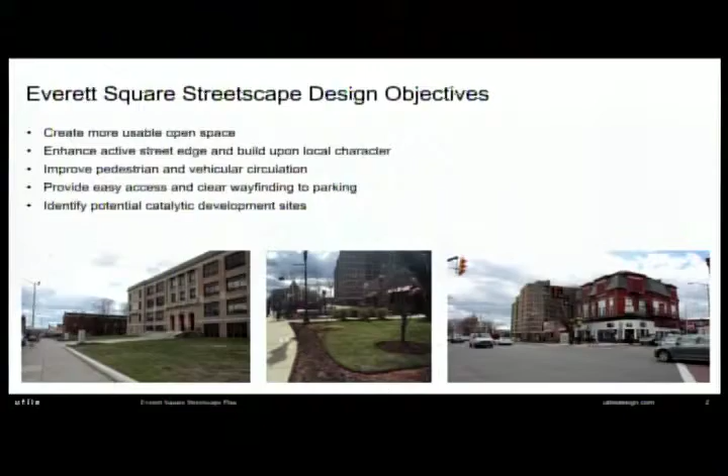Yeah, that has to be green. Thank you. Sorry, can you hear me now? Yes. Okay, should I repeat what I said, or did you hear me? Please don't, they say. Okay.

So there were a couple of objectives for the project. One was to see if we could create more usable space for pedestrians in the square, while thinking about traffic issues at the same time. We thought about ways to improve the character of the square, which mostly had to do with some of the abutting properties, both existing storefronts and maybe potential new development that we'll talk about. I already mentioned pedestrian and vehicular circulation, getting those in balance with both functioning better.

We wanted to think about ways to make it easier to find your way to parking if you're coming to the square for a restaurant or a business. At the same time, we wanted to see if there were a couple of potential development sites that could be more catalytic, which I'll show you as well. So that's a bit of background on what we worked on.

The scope of our study extended from Norwood Street north and south, just past the old high school, going north on Broadway, down to 16 and just past the school going down Broadway in the other direction, and about 2 or 3 blocks off of Broadway to the east and west, to think about a larger area of influence. We didn't do concrete recommendations there, but that larger area focused along Broadway, and we thought about traffic and people walking to the square within that larger radius. You can see on the left a blow up of the area in terms of what we looked at.

Our primary focus was the streetscape and open space at the Norwood and Chelsea Broadway intersection, the main intersection to the square, but also the way School Street slips off of Broadway and heads on a diagonal heading south. We wanted to see, because the School Street intersection was so close to the Chelsea Street and Norwood Street intersection, if there was a better way to arrange that.

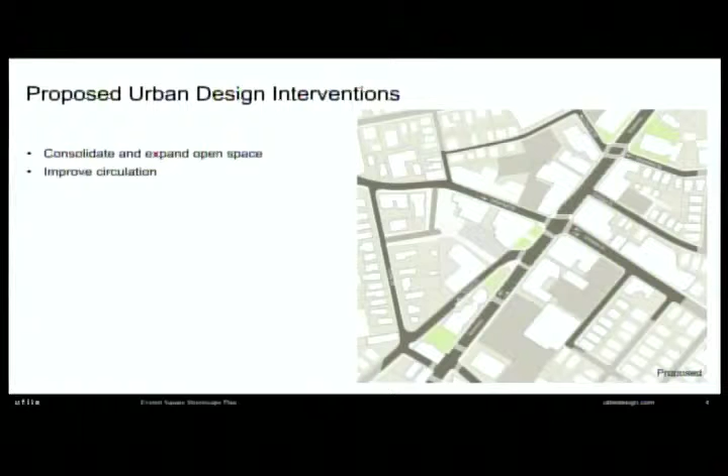One of our initial ideas and recommendations, working with Jay and Tony from the planning department, was to extend Union Avenue through and connect to School Street Place to make that a more legible street. One advantage is it would allow for more traffic flow, since Norwood Street is currently one way eastbound with relatively fewer choices, to get more of a traffic loop that works better for people coming and going through the square.

You'll see in a couple of slides that we were able to do that without losing any aggregate parking in the square, looking at all of the recommendations we're making.

Our other recommendation was to extend that new street as a straight street all the way to Broadway, to get rid of the slip lane and make that a more conscious turn off of Broadway. The advantage is that we can make the open space, both in the square and in front of the library, larger and better connect them visually.

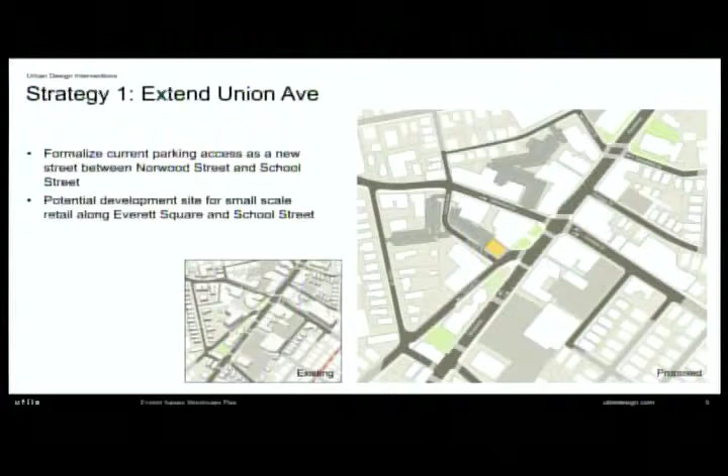If I go back a slide, that's the before, that's the after. The consequence is that we can make the open space at the nose of the library and the open space in the square more of one park landscape, one experience, so they seem like one space and not two.

Our inspirations for the renovation of the park include some things we're recommending to make the grassy spaces more usable.

One of our recommendations is to get the lawns up off the sidewalk level a little bit. That makes people want to sit on the grass. When the grass is down at sidewalk level, people are less motivated to do that.

We also want to use some of the edges of the lawns as seat walls that people can sit on. These are two inspirations, Lafayette Square in Cambridge and the Marriott Plaza at the Kendall T station, showing the kind of space we're talking about.

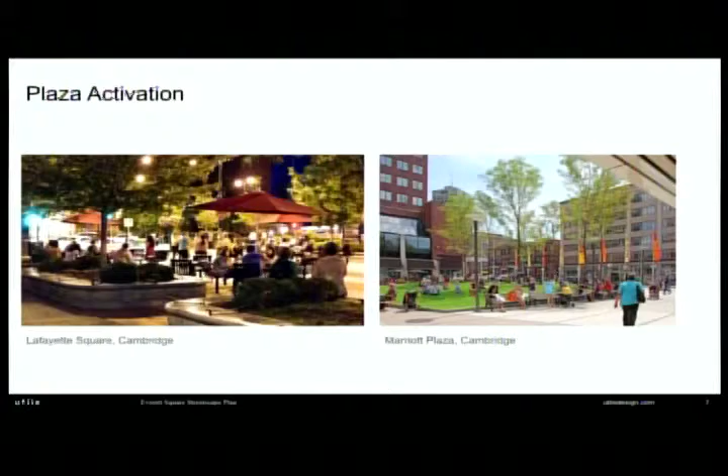The idea is that the short piece of School Street, which either connects through to School Street Place and Union Ave, or requires a left down to School Street, would be a raised intersection with paving that matches the park landscape on either side, with bollards, giving a bit more of a European feel where those streets connect, creating a continuous landscape from Everett Square south to the library.

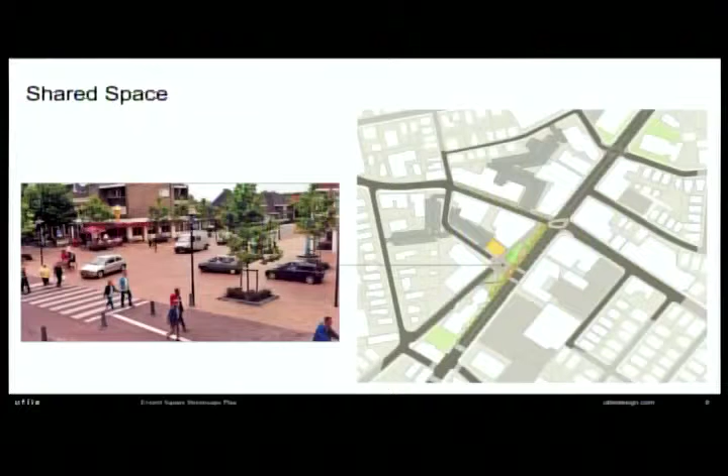This is another inspiration photograph of what that can look like, and this rendering shows the consequences. You'll see in a few minutes that this sets up a new development site at the corner of the new School Street Place and Union Avenue extension, and the way the landscape is designed to cross from in front of the library over to Everett Square.

The design includes three triangular grass panels that conclude with three steps you can sit on, facing this new treatment of the road, with seat walls on either side where people can sit, and handicapped access to the lawns.

The skinny end of those triangles are grass ramps so you can get up onto those lawn panels, and they're a nice size for people to sit on when the weather is nice.

Down towards the library, we have a seating area with movable park chairs, using the library as a backdrop, on this end.

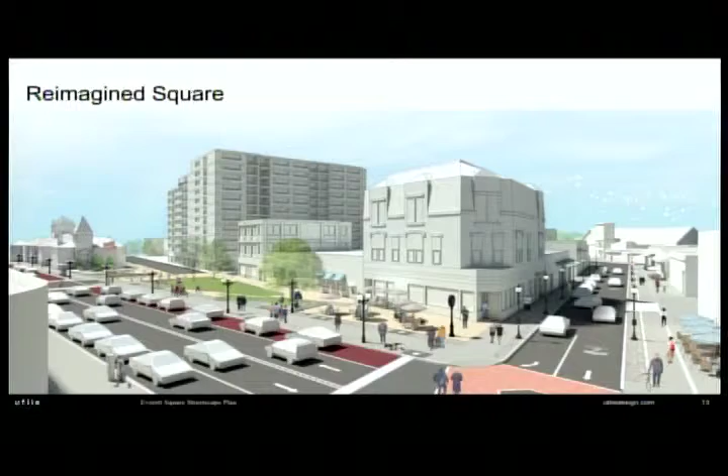So Jessica's now going to talk about some thinking we did about Norwood Street as part of the same concept.

Thanks, Tim. So again, my name is Jessica Robertson. I also work at Utile, and one of the major things we're focusing on with this study is Norwood Street and how to really make that a more vibrant place to be.

One of the things we were considering is, should the traffic, currently it's one way, sort of eastbound, and so we were looking at whether or not we should change the direction but keep it one way, or perhaps make it 2-way in order to get a different pool of people exposed to those businesses. So we looked at a number of different options, including both the traffic direction and expanding the sidewalk as variables.

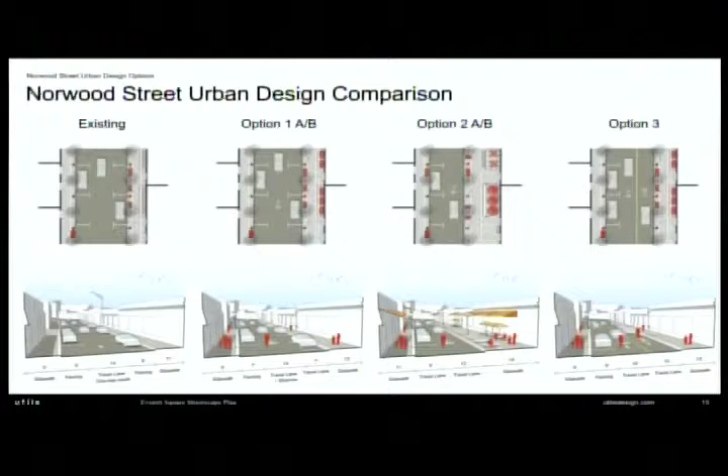So in most of these options, we removed a number of parking spaces on the north side of the street to either widen the sidewalk significantly, or in the case of option 3, to make the street 2-way.

What we found in terms of the traffic comparison was that while keeping it one way in either direction had potential positive benefits for enhancing the character if we combine that with widening the sidewalk, the other benefits weren't really there for reversing the direction but keeping it one way. And if we were to reverse the direction, it would require a lot of other reversals on other streets, so that would be potentially really complex.

In terms of the 2-way option, it would definitely increase the exposure to some of those businesses, and it would potentially simplify the parking and the general circulation by having more options for which direction people can go.

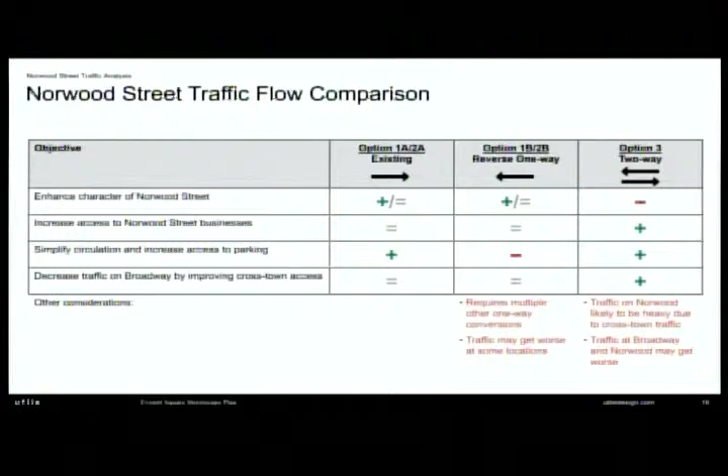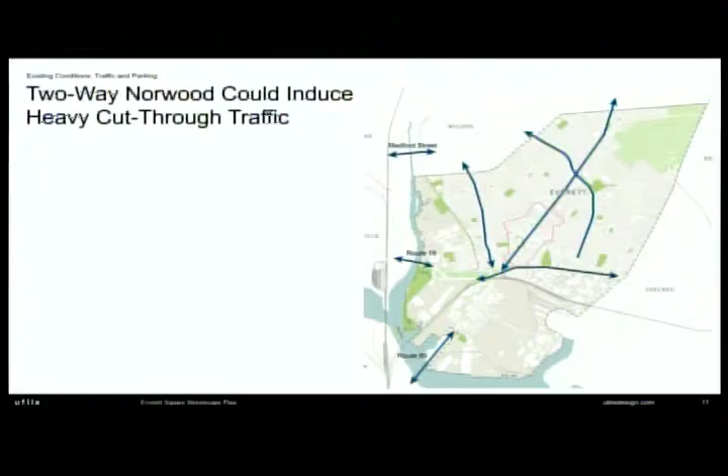However, we were concerned that because there are very few ways to get across Everett, as you can see in this image, most of the streets bump up against a one-way or aren't exactly aligned, so you would have to make a right on Broadway and then a left on another street. So we were concerned that if we made Chelsea Street and Norwood Street continuous in both directions, that it would

actually induce a lot of cut-through traffic, and so you would get Norwood Street overwhelmed with traffic, and it wouldn't necessarily be the people we were hoping to attract who are coming to stop in Everett Square. It would just be people trying to get across town.

So for all of those reasons, we recommended that we keep it one way in the current direction, but that we expand the sidewalk on the north side of the street. This would allow us to have space for sidewalk cafes, for trees and better lighting, and also it would only remove 9 parking spaces, which we talk about in this particular diagram.

If you can see, hopefully you can see a little better on your printouts. We've combined all of these moves on Norwood Street with reconfigurations of the off-street lots that can make them a little bit more efficient, so that we end up only 2 spaces down for the entire square. So we think that the placemaking benefit of widening Norwood Street is really important, and that can really improve both the character of the square and the vitality of those businesses.

We think that by increasing access to the existing parking elsewhere in the square, we can make up for losing that small number of spaces. So in addition to reorganizing the way the parking spaces are striped in the off-street lots, we're also making a couple other important changes here that will increase access to parking.

Right now, the Corey Street entrance side of the parking lot is not very well used during the day. It's usually pretty empty. Part of the reason is that it's an exit only onto Corey Street. So by flipping the direction of those spaces and making it an entry from Corey Street, we think a lot more people are actually going to park in that section, giving us higher utilization of the spaces we already have.

Also, that can help potentially with the traffic on Norwood Street if we're peeling people off sooner. We're proposing that this be combined with better parking wayfinding, so that if you're coming north on Broadway and your ultimate destination is somewhere in Everett Square, you'll see a sign that says parking this way when you get to the fire station, telling you to take a left here to get into the parking lot, and you won't go all the way through the middle of the square.

Same thing with the Union Ave extension that Tim mentioned earlier. Right now, Union Ave comes out on Norwood Street past where the parking entrance is, so you can't get into that parking lot if you're coming down from Union Ave. With our proposed realignment, you can go straight through, so anyone coming from the north would also be able to get into that parking lot.

Finally, the Union Ave, School Street, New Street section that we're proposing is 2-way. That's how it's shown here, and there's room to make it 2-way so that you could enter from both directions and access the parking that way.

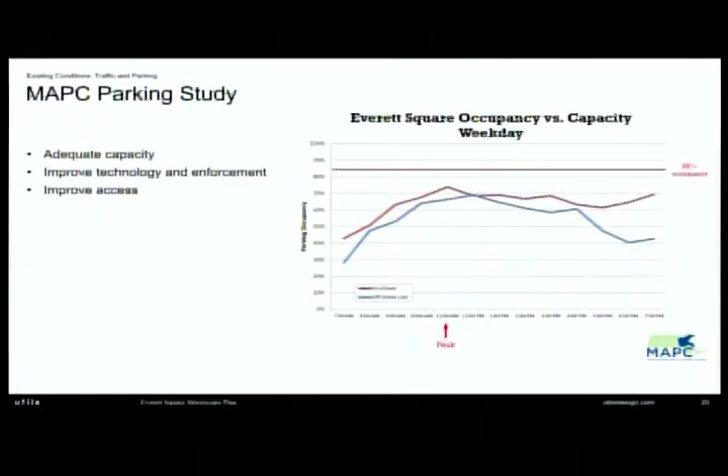85% occupancy is a typical target. That means it's well used, but you can still find a space. We're below that for both on-street and off-street parking. So it's really a matter of using parking management and new parking technology, along with some of these access improvements we're talking about, to make sure we're utilizing the existing spaces more evenly, rather than necessarily looking for more parking.

And then Tim's going to come back and talk about the development.

I want to reiterate that the off-street parking lot layouts we're proposing, and their access points, are going to make the distribution of parking in them more even on both sides of those lots, helping with the perception of available parking spaces. We think with good signs, catching people coming from the south up Broadway or coming down Broadway from the north, traveling south into those parking lots will help with the perception that there's parking available in the square.

I also wanted to comment that we're proposing wider sidewalks on both sides of Norwood Street, 2 feet wider, from 9 feet to 11 feet on the south side of Norwood, and quite a bit wider on the north side. We favored the sunny side of the street because those sides tend to work better for outdoor cafes in general, so that was the logic for that.

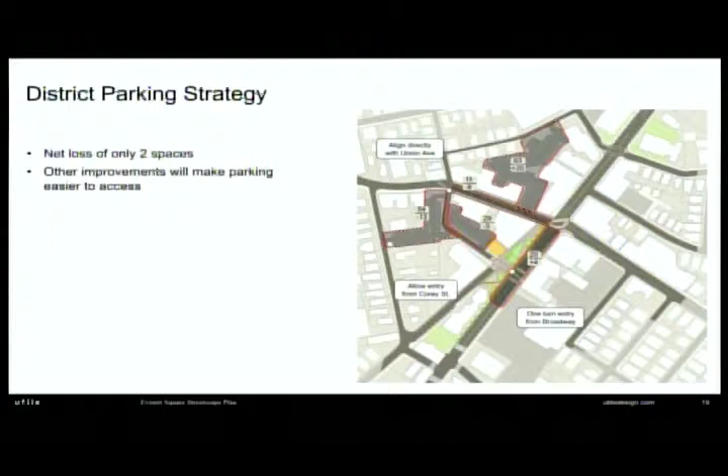I'll transition to the next piece by saying that part of the logic of this plan is to make those two parking lots much more clearly the visitor parking for the larger choice to go to the square, park once, and do a couple of things, rather than just parking to do one errand and then moving your car again. That's a little bit the logic of it, and that feeds into the development concepts we're going to show you.

One of the things we wanted to address with the plan, and this next piece is a slightly later phase, slightly bolder thinking I'll say. Everything we've shown you to date is within the city's ownership and right-of-way, and could be phased capital projects, both the park and some of the streetscape improvements, because they're in the public right-of-way. What we're going to show you next are some development concepts on private property. We wanted to test the concepts to understand the development capacity, but also see if some redevelopment might improve the character and visual quality of the square.

This first slide shows the idea that there are some gaps in the square. One large gap is the parking lot in front of the Rite Aid, which is much more suburban in feel. It's very convenient, and we know the Rite Aid is an important resource for people in the square and a reason people come here, but it has a different presentation than the other buildings. Then there's that gap between where we're doing other kind of work to get back to the new parking lot layout—that's where those two red stripes are. There's also potential for development along Chelsea Street coming off the square.

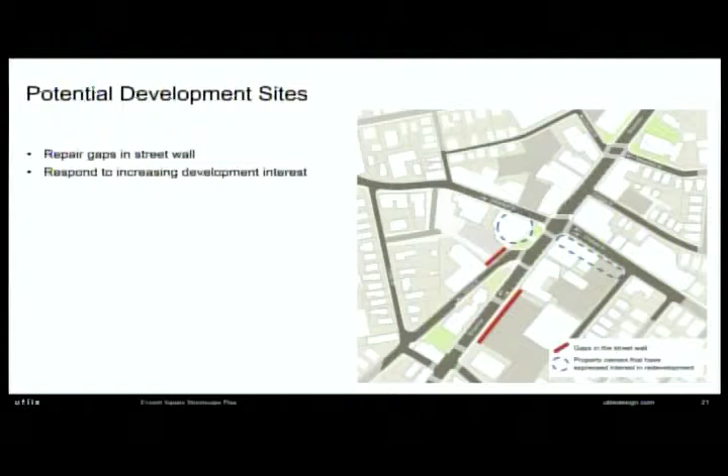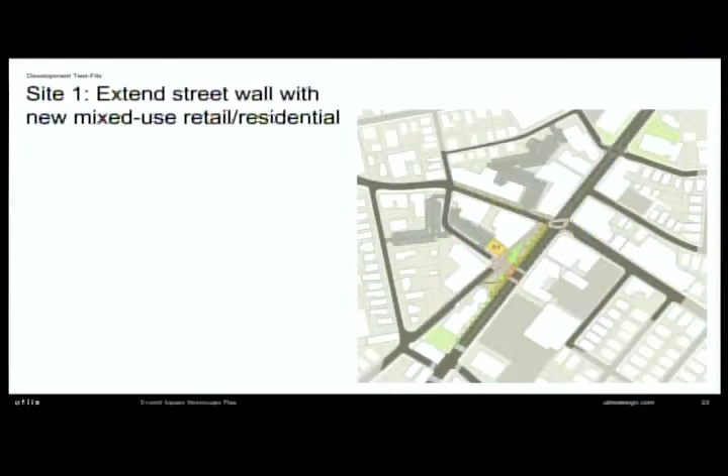So what we did first is look at the development site created with that Union Ave, School Street Place extension. It's labeled in yellow with a 1 on there. That creates excellent frontage for the expanded Everett Square, in terms of a restaurant going in there with an outdoor cafe that might spill into that space. If you just build on that little parcel we create, you can get a small building there—a restaurant of about 2,800 square feet, and 4 units. That would be a walk-up building; it's not big enough for an elevator, but you could get 4 units, 2 per floor. It would also do a nice job meeting the square to create more activity along it. So we thought that was a nice idea.

If you imagine that being a larger development site, maybe including the one-story restaurant next door, that makes it the size of a development site that would work for an elevator building with a corridor on upper floors with condos or apartments off of it. You get a 40-unit project, which is a nice size in terms of financing, and red would be

Tony and Jay wanted us to look at what would happen if that whole corner would be redeveloped, not in terms of design, but in terms of what the capacity of that site would be. In that case, you get a 70-unit project, just laying out the floors. Those are both what we call development test fits or scenarios that are 70 feet tall, which is as tall as you can build with stick-built construction, the scale developers in the area are looking for now. So those are just some options.

So just to be clear, I don't think we're trying to tell you that you should do this, or that, or the other thing, but it was to give options, right? We were asked to think big and come up with every option you could think about in the square that would make things more lively, use resources that haven't been resourced. So we're not advocating taking anybody's property or anything like that, but you'll get a sense of what's possible overall, if you so choose.

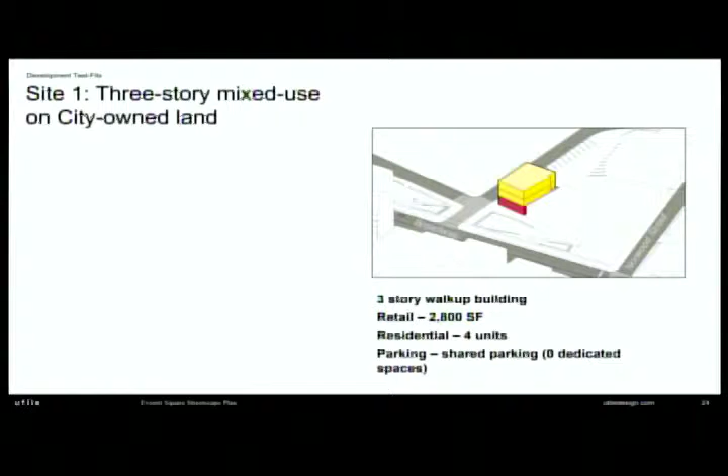And what's interesting is that's owned by the city, that little piece, right? These, of course, are owned by different people. It might even be an inspiration for private property owners about what's possible.

We like the idea, in the scenario on the left, of getting as much transparent shop front with activities spilling into the square as possible. But we also like the idea of people living above those restaurants, being part of the population of the square, to get some real stakeholders there, people who live there.

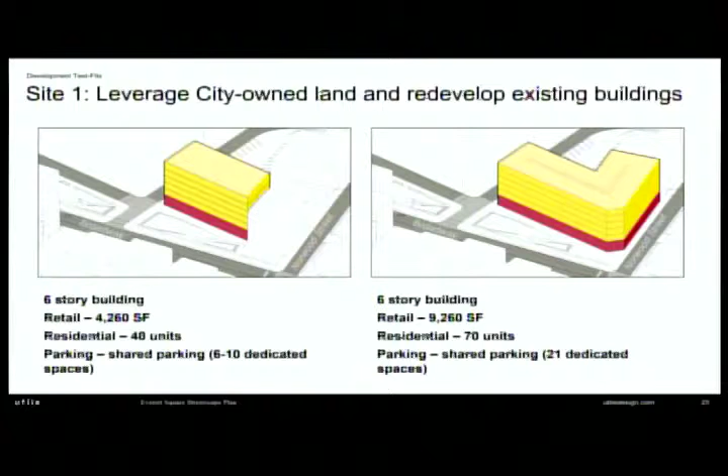So those are those proposals. Thinking even bigger, what if the Rite Aid could move from behind its parking lot out to the street, out to Broadway? And what if we then put the Rite Aid parking lot behind, which is more like the pattern of parking lots and buildings we're looking at on the west side of the square, the west side of Broadway.

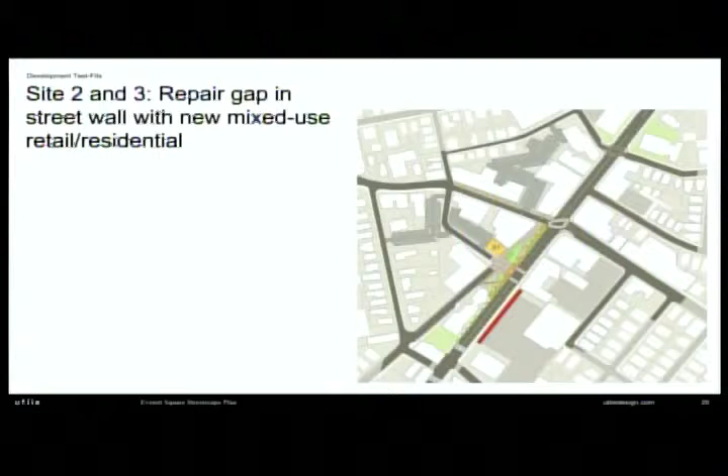So again, that's that gap where the parking lot is. This is one concept we looked at: what if you continued Marlborough Street from the neighborhood all the way out to Broadway? What's super nice about that, by the way, is that Marlborough Street would have a vista to the very beautiful facade of the library. So that's in alignment with the end of the library there, which might have been the original alignment, I don't know.

We'll have to look at historic maps to see if that's true, which means you would get 2 development sites on Broadway. The site labeled number 2 is the same size as the Rite Aid. And what you would do is put the parking in the back, and have the Rite Aid entrance on the 2 ends of the building along Marlborough Street, and then the store would kind of feed into the south.

You could put apartments above that, and you could also get a development site labeled number 3, and create a new corner at the corner of Marlborough and Broadway that would make the square work much better east and west, in terms of being able to get from the square to the neighborhoods and connect the library and all those things.

When parking lots are consolidated like this, you get a much more efficient layout of the spaces and can fit more spaces. Also, with a shared parking strategy overall, different businesses or land uses with different parking demands at different times of day can use the same spaces, so each space is used more of the time.

If you have retail and commercial people parking their cars there during the day, and residential people parking overnight, they're all using the same spaces, so you get a lot more use out of the same number of square feet of asphalt. That's what we're proposing here, and I apologize, the version you have on paper had an error in it.

That would be approximately 205 spaces combined, and that would be something potentially up to the city to do, to consolidate all those parcels and make it one shared parking area.

With this concept, the way parking is dealt with is consistent on the east and west side of Broadway. You've got the nice pedestrian environment along Broadway, Everett Square, and the open space in front of the library as the destination from the parking. But the parking is just behind those buildings.

A lot of well-designed small towns are actually laid out that way, where you might look for a parallel parking space but always know there's parking behind. So it seemed like a pattern for us that would work very well.

This concept on sites 2 and 3 generates 120 units total between the two. So you see there are some interesting opportunities for housing right in the square, which we also think would be a benefit for the population there in the evening.

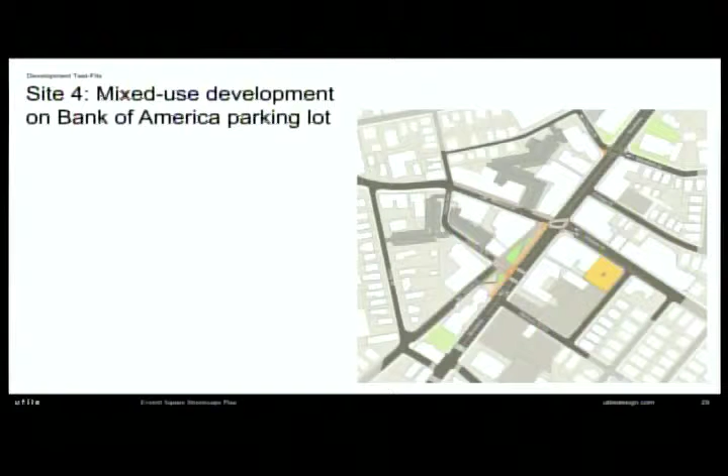And then, of course, there's also a possibility at Site 4 for some development that would have to get worked out with the parking concept we just showed you. There's also room for development off Broadway at site number 4. Just testing that vacant parcel, there's room for 33 units, but that parking would be part of the shared parking we showed in the previous slide.

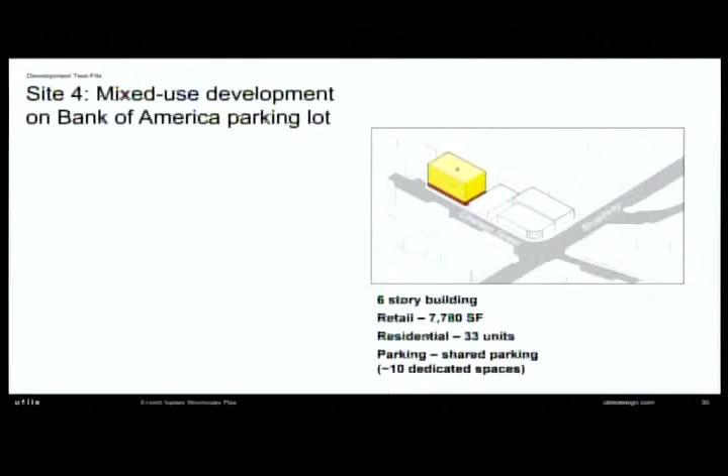So in conclusion, for development opportunities right in the square, we've identified these four. Development Site 1 comes with a relayout of the parking lots along School Street Place and Union Ave, that's city-owned. Development sites 2, 3, and 4 we think add up to a more coherent streetscape, which I think is one of our goals too. We've really thought about the aesthetics of Everett Square and how new development can contribute to it.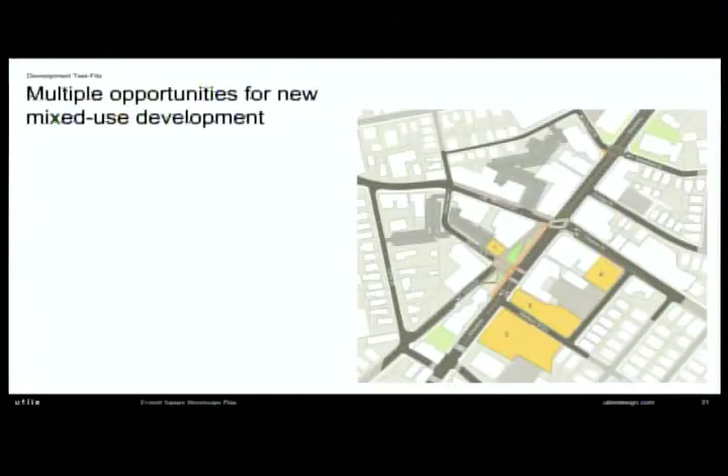Last but not least, we're recommending a zoning overlay. We've been working with Jay and Tony on this, an overlay confined to just those parcels we showed you and parcels just off Broadway, to change the code a little bit. It would include allowing mixed use as of right, to allow for retail on the ground floor and housing above.

We'd recommend increasing the allowable height from 4 stories to 6, because you can build 6 stories up to 70 feet, which is stick-built construction. By the same token, we're recommending raising the height from 65 to 70 feet. Above 70 feet you're in high-rise code, which changes the equation for construction costs. There's no reason to go above 70 feet anyway, because once you're at 71 feet, you're using steel and concrete, and all kinds of code requirements come into play that don't make it economical.

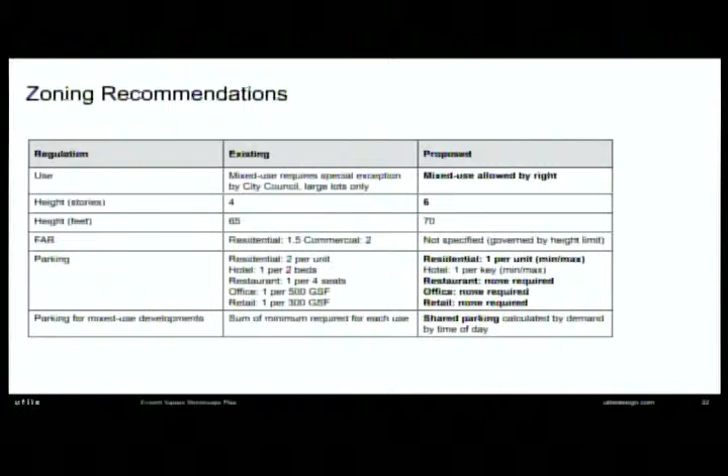We're also recommending in the overlay not to include floor area ratio, but just have the heights and number of stories govern that. And we're recommending lowering the required parking for residential from 2 to 1 in any new development in that area, not requiring any new parking for restaurants because they're going to park in our parking lots, and because there'll be limited office, taking that off the table too.

And then building into it a shared parking calculation as part of this overlay that we haven't worked out yet, but it's back to the story that Jessica told, that if there are shared parking lots, developers would have to enter into a discussion with the city about how those might be used. So again, this is just a draft, but what we think one of the next steps might be.

So with that, Jay, does that cover the information? Yeah, well, thank you, that was great, and I think we want to open up to questions from the councilors at this point. I have Councilwoman DeFlorio, Councilman Hanlon, and Councilman McLaughlin.

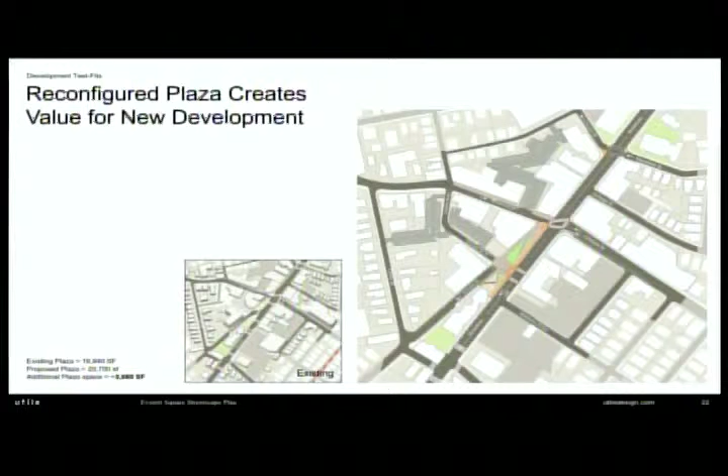And that's why the daytime parking rate—Jay can send you the data from the MAPC study that gets into very detailed, hourly observations—the daytime parking utilization in that section of the parking lot is very, very low. So there's very few people who enter from Norwood Street and want to go to that section towards Corey Street. That's why we think if we reverse the direction there, we'll have more people coming in off of Corey Street who want to park without even having to go on Norwood Street at all, which will help a little bit with traffic on Norwood Street.

Okay, all right, Jay? I'll just add to that too—I think part of the objective here was to limit the amount of circulation people do to find a parking space.

So by making some of these changes and efficiencies, the hope is that you'll find a parking spot sooner and be less likely to go back out onto the street and circle around again looking for one.

But if you come down that street trying to find a spot, you can't find it. You go down Broadway, you can't find it. You go up the street, you can't find it. You go into the School Street parking lot, you can't find it. Some of us have to park on Mansfield Street just to get into this building.

We should have more parking in the city, and I look at that, but I don't want to create a bottleneck either. I don't want people saying we can't get around, we can't do this, because we're the ones who are going to hear that and get blamed for it.

We want to see that really thought out. Anything else, Councilor? Not right now. Okay, thank you. Councilman McLaughlin.

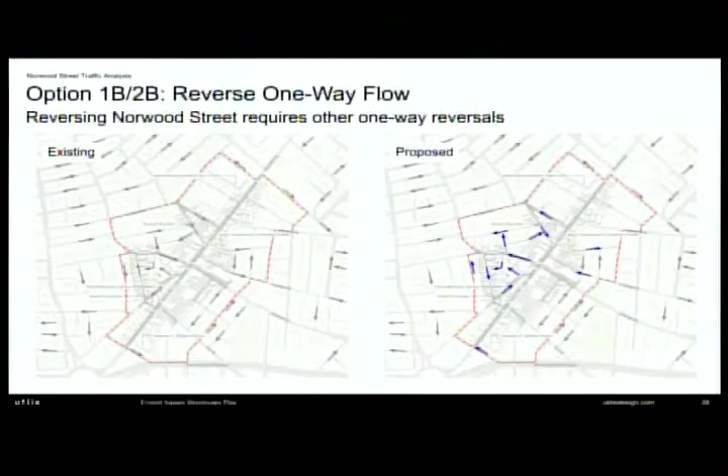Yeah, I'm not sure the two-way works, but right now, as I'm sure you understand, Mass General Hospital has patients coming from outside the city who have no idea how to get there by vehicle, because you have to know the city to loop around School Place Road, come through the parking lot, and then take a right onto Norwood Street to get to MGH or any of those businesses. So that was one of my first questions.

The widening of the sidewalks — there's one side of the street you're going to widen further or greater than the other side. Which side is that on Norwood Street, northbound or southbound?

So we're proposing that the north side of the street, where the MGH office and the post office are, gets wider for a couple reasons. One is that it gets more sun, so if you're going to have benches and cafe tables, that's a nicer place to sit. The other reason is that side of the street has existing businesses we think would be eager adopters of that extra space - there's a bakery, cafe, and a couple other restaurants, including one already putting out tables and chairs even though the sidewalk is very narrow. So we think that side would get used very well.

We're also adding 2 feet to the south side, so there will be more room on both sides.

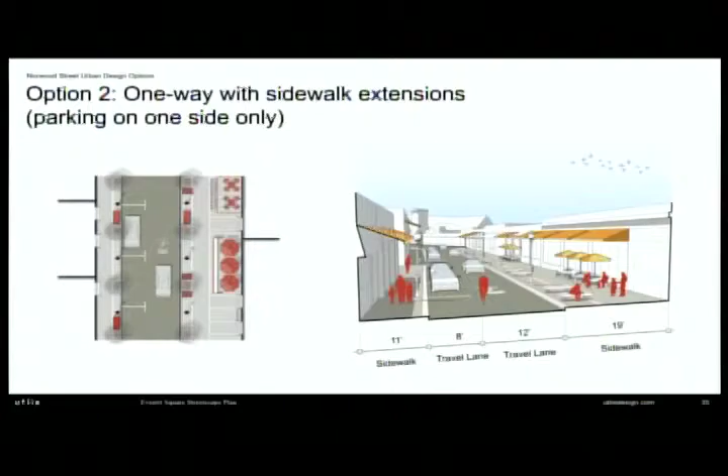Can you name any area in Boston that has seen such a dramatic change in your time as a city councilor that we could visualize something like this transpiring? Do you think of a location, Councilor?

The entire inner ring of Boston has seen it, I think. I represented the North End, East Boston, and Charlestown. East Boston - those were neighborhoods that in some ways didn't mirror Everett, but my family lives in Everett, the North End, and East Boston. Those neighborhoods have changed, and you're seeing outdoor cafes and infill construction of both housing and businesses there. They're really tight, but you do see businesses even in those areas.

And the other place to look is Somerville, which is seeing a real renaissance in the old mall area, and you're seeing it in Union Square and elsewhere. So I think the things driving development in East Boston and Somerville are going to drive development here. You're close to downtown, you've got an urban feel that's unique - it's authentic. It's not something created or made along the river for people of a certain demographic. So I think what's happened elsewhere could likely happen here if the ingredients the city puts together are right.

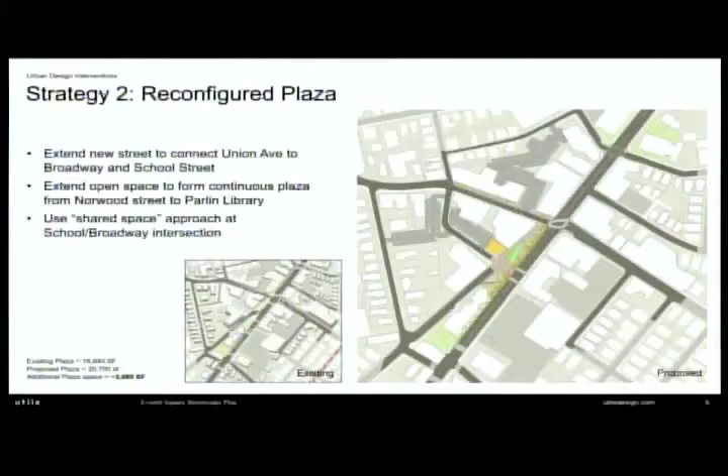So what are the thoughts, or are there any thoughts at this point, as to any expansion beyond the square? Well, often study areas are defined before we know what we're going to focus on, so that was part of the original scoping document we signed up for. I think there was also a notion of thinking about this building and the old high school and the potential for those things too. There's been a parallel study going on about potential reuse scenarios for the old high school, and when we were scoping this originally, we were wondering how far that redevelopment thinking would go.

But we made a decision, once we got ahead of steam on the streetscape and park improvements, that it might be best to focus on those development sites right at the square to get the biggest bang for the buck. But that was really the logic for the larger scope.

Is that a fair assessment, Jay? Yeah, I think that's right. I think also there's an area of influence that affects the smaller area — the character of the neighborhood surrounding Everett Square, the traffic patterns, things like that. So when you take a look at a small area, you do want to take a broader look as well, and I think that's also what this reflects.

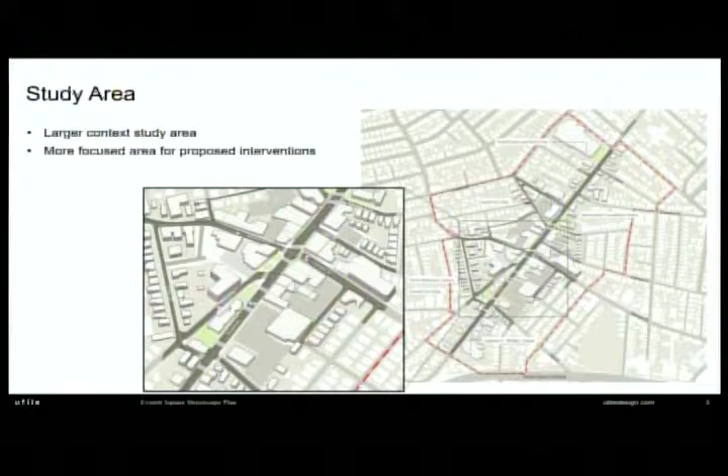Just one other comment — for the zoning overlay district, we would recommend it be on more of a larger zone scale, because the businesses line Broadway on both sides, pretty much that whole area. That would be the zone where you could have successful mixed-use development with retail on the first floor and residential above. Also, the areas a bit further out from the center of the square have more gaps in the street wall and properties that might be more attractive to redevelop if the zoning were changed there, so you might be able to revitalize some of those areas too, without such a focused public investment.

Okay, thank you. And I tend to agree with you that making Norwood a two-way, or reversing the traffic, would actually undermine everything you're trying to do. It would make it a cut-through, it would make it dangerous. People wouldn't be stopping to do exactly what we're trying to do. And to that extent, if there's a way to tweak the sidewalk on the opposite side so it can extend out a little more too, you could have that outdoor cafe on both sides.

And I think if we squeeze the travel lane a little bit, it might cause cars to slow down too, so it might be able to satisfy a couple of things. Yeah, and when we fine tune that concept, there'll be some public process to make sure we're getting the balance right. What's nice about the Union Ave, School Street Place street extension, because that's two-way, is that...

you could close that stretch of Norwood for festivals and still have another way for cars to get through. We also thought about special weekend festivals and events where you could close Norwood, that first block back off of Broadway. That's also why we like the Union Ave extension, it allows for some flexibility for special occasions.

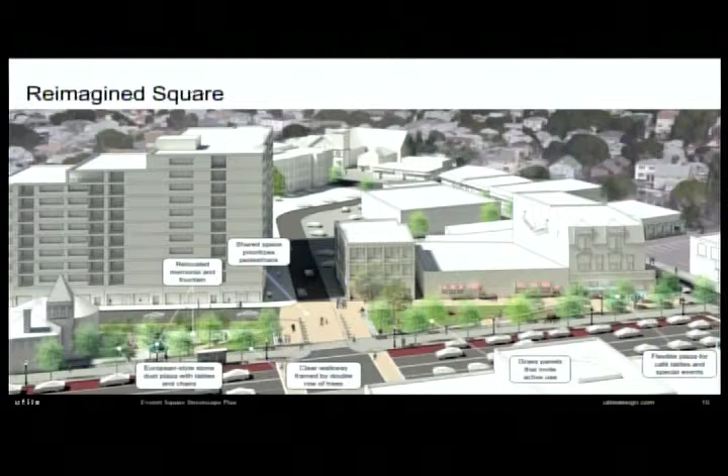Okay, and then the last comment I have, I think it's slide 28, dealing with parking. I just want to make sure I'm clear, I guess it's as flexible as you want to be creative with regards to the parking. Are we saying 205 spaces on both sides of Broadway?

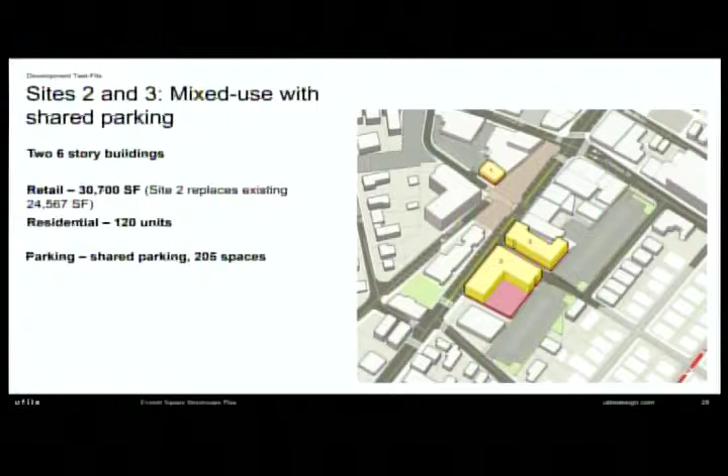No, just on the east side of Broadway, combined with the parking on either side of the extension of Harrison and Marlboro. And that's only if we can get everyone to do consolidated parking.

And you can do that a number of ways. It doesn't necessarily need to be a purchase, it could be tax incentives or anything. There are a number of cities and towns in the area that have done an MOU where it's owned by the private property owner, but the town has an easement to have it publicly accessible and usable, in exchange for plowing it or whatever, so there's some sort of agreement on paper with the property owner. But to the public, it all seems like one big public parking lot.

We're helping Chicopee work out an agreement to get that to work with a shared parking concept, because they had the same issue, lots of private parking lots, like 2 cars in a lot of 25 because of the business that was there. Lee, who's the city planner there, is working on that, both the legal and operational issues.

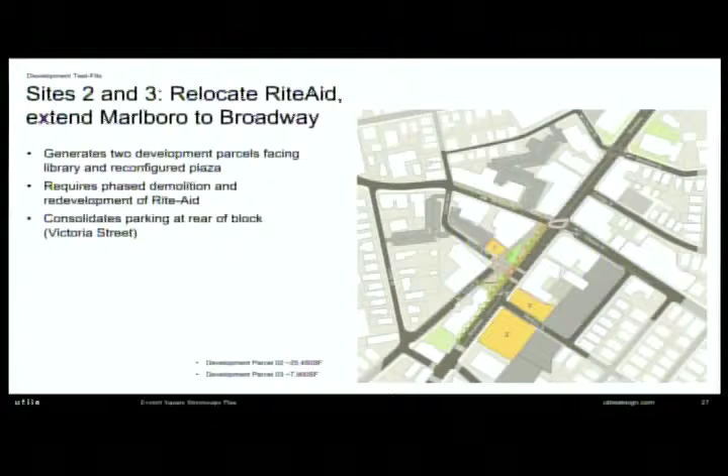I think it's hard to imagine because of the condition today. The Marlboro extension to Broadway would be a legitimate street with sidewalks on both sides, and there would be two parking lots off either side of it. So that would really be the feeder road to these parking lots. It's different than today, where that whole piece is also part of the parking lot system. So as a pedestrian, you'll be able to get to the parking lots on either side of that new street in terms of safety, with relatively few curb cuts to get to the parking on either side. So we think from a pedestrian standpoint, it's going to be much safer than it is now. But we'll provide in the next phase more detail with arrows about getting in and out, so everybody in this group is fully on board with how that works.

Okay, my other concern is parking, like my colleagues were saying. It's hard to believe, you guys are the experts, but it's hard to believe traffic is bad now, and parking is almost impossible. I know we're going to redesign the parking lots that are there, but we're talking about the stores built now, the buildings that are there now, like where 810 is, and you want to put condo units up top and restaurants down below, correct? So you're adding more people, which parking is bad enough now. And then you want to build a 70-unit building with no parking garage.

So this is going to be a miracle. I just don't see how we have parking that we can't even park now, just by redesigning parking lots. And if Rite Aid says no, they want to keep it like it is, you're losing a lot of parking spots again. So is Rite Aid the key to this whole operation?

On the east side of Broadway, they are. In other words, if Rite Aid doesn't want to move in the medium future, or that landowner, then the only real development opportunity on that side of the square is that smaller development opportunity on Chelsea Street, a couple of buildings to the east of Broadway. And in that case, if that was the only thing that had happened, the parking would have to get figured out with just the nearby landowners.